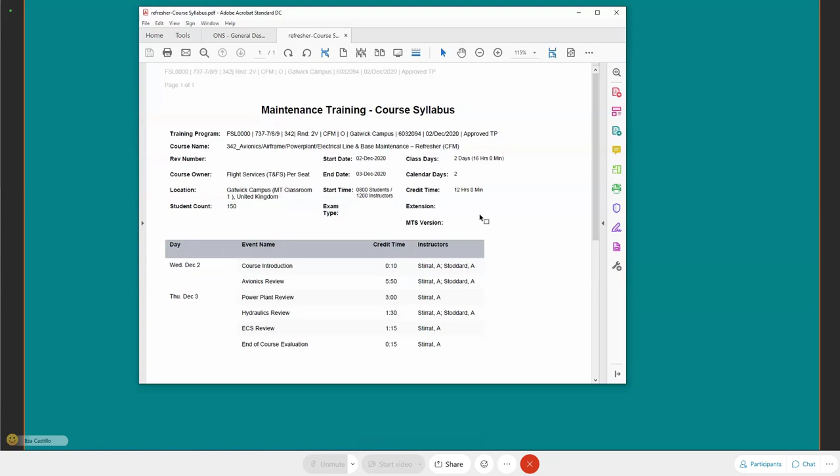This is our schedule for today. Hopefully you can see it. What we're going to review is going to be the power plant. So the power plant will look at the LEAP engine, the electrical, and the fuel system this morning. That will take us up to lunch. Then we'll take about 45 minutes to an hour for lunch. And then the rest of the day, we'll go through the hydraulics. And when I say hydraulics, it's going to be hydraulics, landing gear, and the flight controls. We'll cover all the bits and pieces there.

And then we'll finish up the day with ECS. And the ECS is going to be actually pneumatics, air conditioning, I just lost my train of thought. I glanced over here and saw a chat message there. But anyway, pressurization, there's no change in it, so we won't really cover any of that. We'll get into wing and engine anti-icing, smoke, the equipment smoke portion has changed a little bit. And then just the small bits and pieces. There's about an hour worth of stuff there. So that's what we're going to be looking at, okay? Let me move this over and we will go ahead and get started.

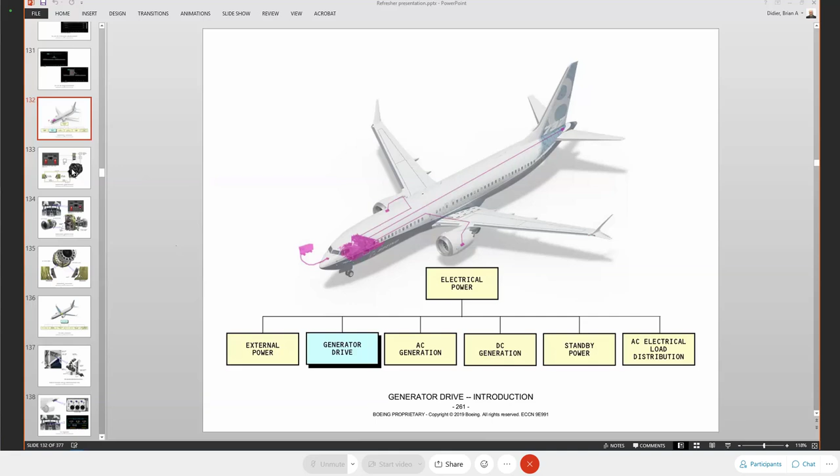So the MAX, the electrical power system on the MAX, no real change on the MAX. It's essentially exactly the same that you experienced with the NG. The bits that have changed with the MAX is really the air oil coolers. Okay, there is no fuel cooled oil cooler on it anymore. That's removed from the system. We have the two air oil coolers.

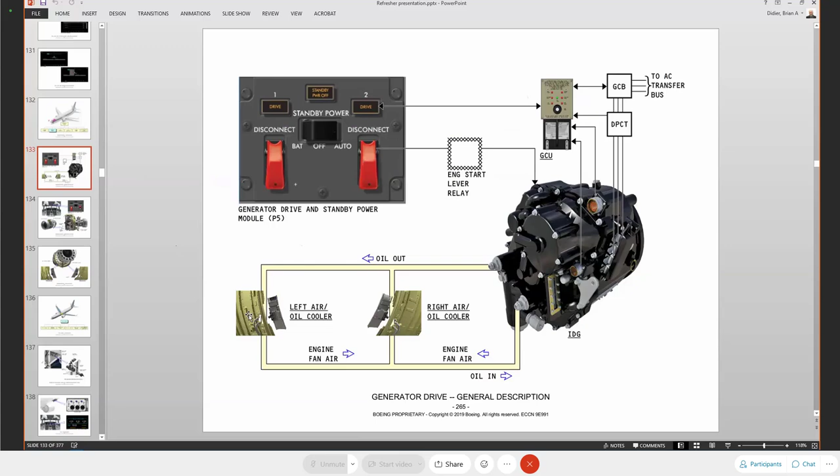These coolers are going to be located in the lower portion of the LEAP engine fan area, okay? So they're going to be down in that section of it. So this is the outer casing of the fan on that side. So when we look at where they'll be, right here is the access point. To access them, you're going to have to open up the fan cowling, and then you'll also have to open the thrust reverser cowling on that side.

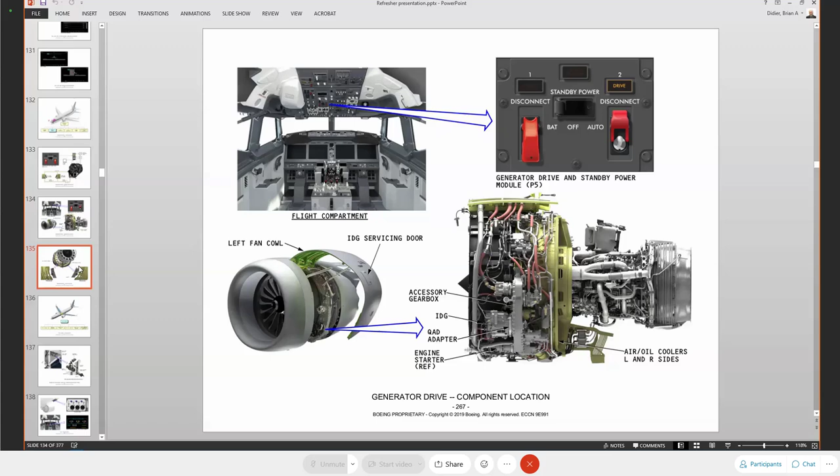They're fin-type surface coolers. You can see them right here, located right in the left and right portion of the engine on the fan. But since they are fin type coolers, they are easily damaged. So if you're having to work in this area for whatever reason, highly recommend that you put the protective covers that go with the system on there so you protect the fins. There is some small allowable damage for the fins, but very little. You'd have to follow the AMM to check on it.

To check the fins to see if there is any damage, what you're going to do is open the fan cowling, the thrust reverser cowling, and then take your flashlight, your torch, as you in England call it, and hold it right in front of the fins, the cooler's fins facing towards you, and then you're able to look through that piece to see if there's any damage on that.

The AMM does tell you that if you have a fin that's bent a little bit, you could try to bend it back. However, be extremely careful because you're probably just going to break the fin off and then you'd have to replace the cooler. So just be careful in that particular area.

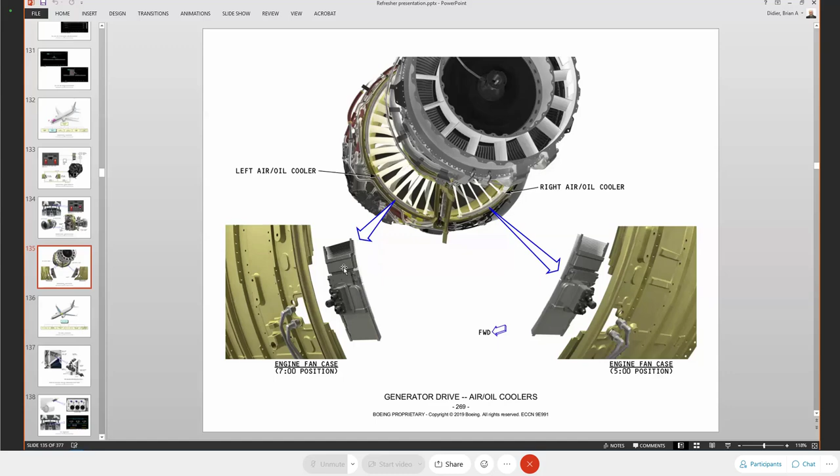To remove and replace the cooler, obviously you're going to have to open up the fan casing, the thrust reversers. You have the two connections right here. And then on the inside, there's going to be a little plate on either end that holds the ends of the cooler down in place, okay? So you just have to look at that. So that's the change as far as the electrical system. Nothing electrical in it other than the cooling portion of it. Other than that, it works exactly the same, like I said, as previously.

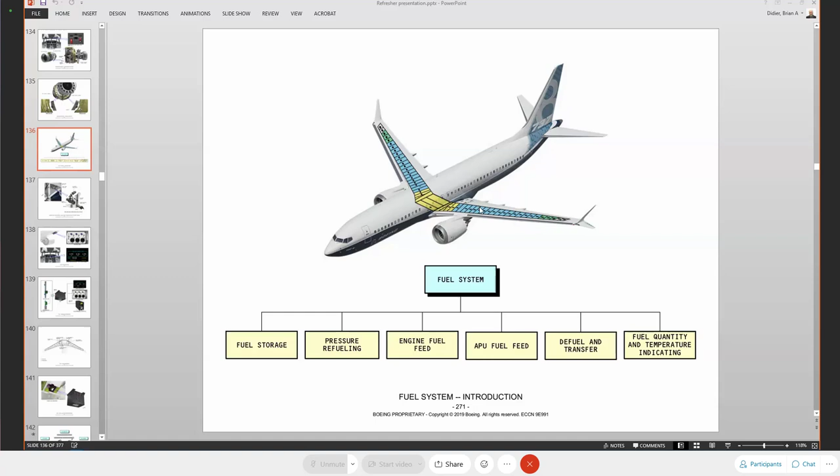The fuel system, not a lot of change to the fuel system as we go through it. Get this back right there. Really what we did is the boost pumps that were on the forward spar, we relocated them to the rear spar of the wing. Okay, so all the boost pumps are going to be in the rear spar of the wing. So we have your aft boost pump and your forward boost pump located in this area right here.

And the reason why they got relocated is because of the engines. Because of the new larger engines, the turbine disc burst area was in that particular area. Okay, so a turbine burst would take out the pumps. So because of certification requirements, that's what caused the pumps to be moved. They're still essentially the same. The boost pumps in main tanks 1 and 2 are interchangeable. The main tank boosts are not interchangeable with the center pumps.

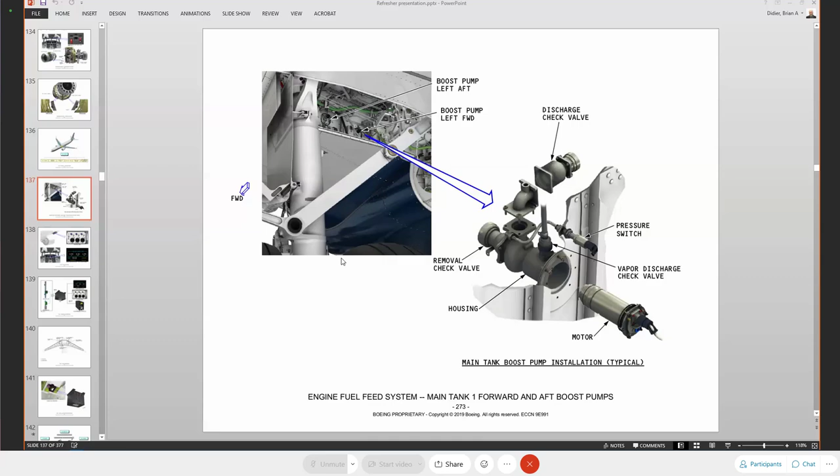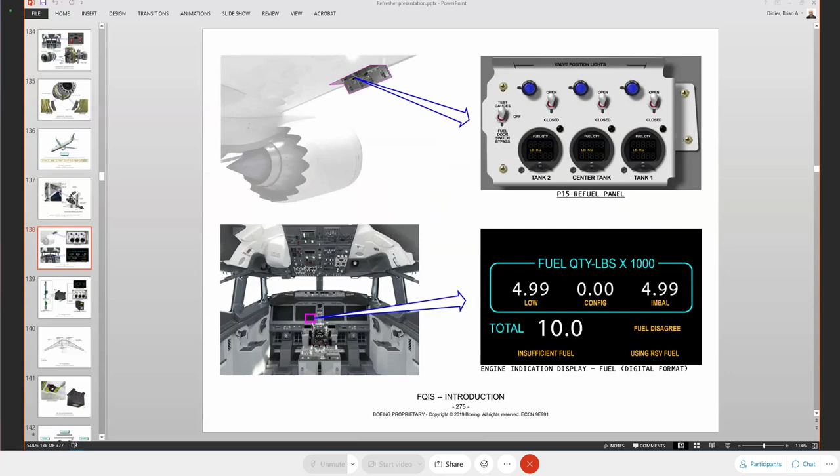Okay? The fuel quantity processing unit, it's a different fuel quantity processing unit. It was redesigned to account for relocation to the ceiling of the forward cargo compartment. So we moved it from the forward equipment bay area to the forward cargo compartment. So if you open up the forward cargo door and you're looking inboard into the cargo compartment, on your right side, if you raise your right hand up and over to the ceiling, you're going to be pointing to the FQPU, the Fuel Quantity Processing Unit. Okay.

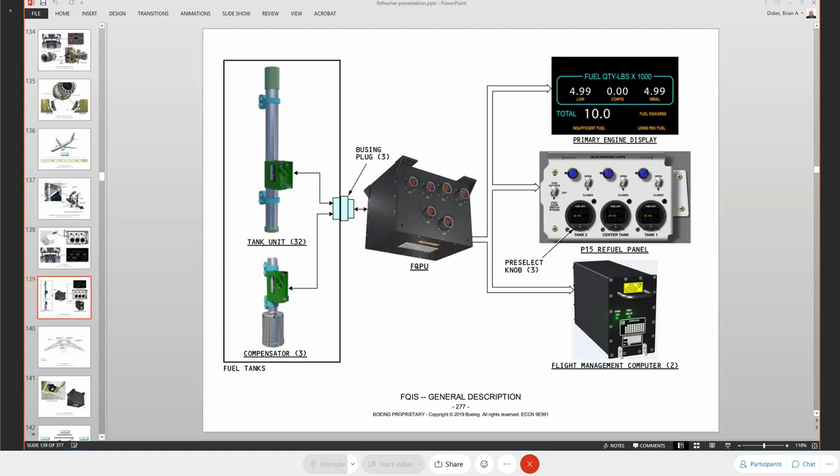New software is also added into the pump, basically because of the new 615 bus that you have. So if we look at it, also our wiring harness has changed. Okay, the harness is not necessarily totally different, but basically the busing plug, we moved that. It used to be mounted right outboard the engines, but we put them in the hole where the boost pump was moved from. So that's where the busing plugs are located now.

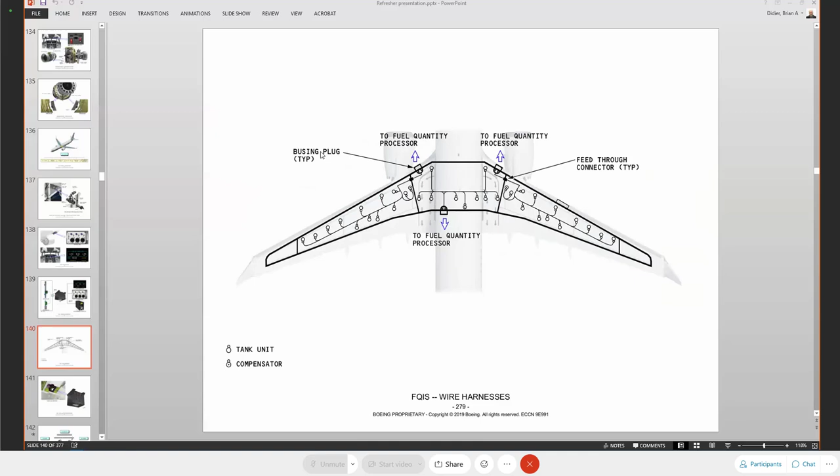Okay. The fuel quantity processing unit, all the BITE on the fuel quantity processing unit is still done through the CDU area. So that hasn't changed at all. What it does is still the same. It's going to calculate the fuel weight. It's going to send the fuel weight out to the FMC, your P15, and the display processing computers. It's going to collect and monitor all the faults.

Okay. Now, the faults are going to be found the same way that you find them in the NG, through the system, through the BITE, through the CDU. However, when Alan was going through the ONS, he would have covered this particular page. One of the things that's here is the network file server. And if you notice right here, we have the fuel quantity processor right in that same area, along with other boxes. Well, the fuel quantity processing unit shares its information with the network file server.

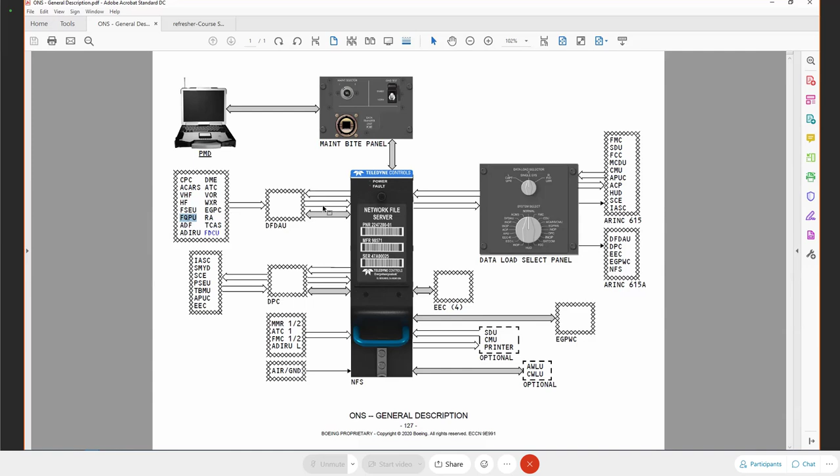It goes to the digital flight data acquisition unit. And since the DFDAU shares its information with the network file server, what that means to you as technicians is that you can open up the onboard maintenance system, go to the existing faults in the extended maintenance page. You can go to the existing faults or fault history, and you can see all the faults that the fuel quantity processing unit may have. So you have a choice. You can either go through the CDU one by one looking at all the faults, or you can open up the onboard maintenance system and see all the existing faults also.

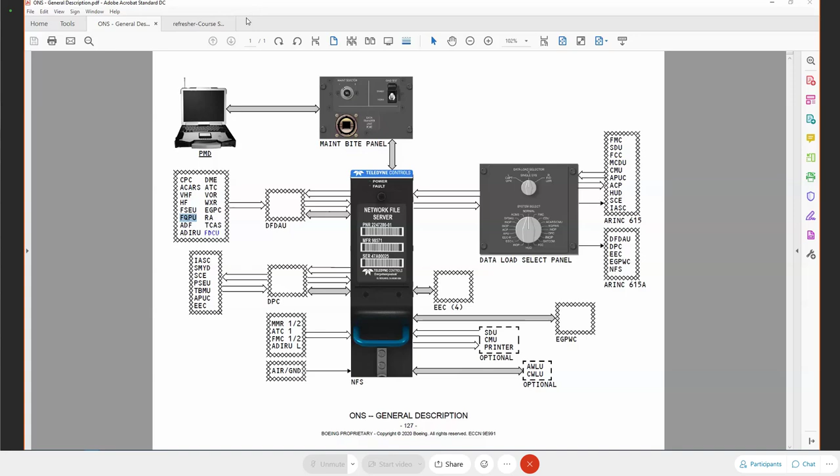So just a little something that you can see. And that's going to be true of all of the boxes located on this general description page. The cabin pressure controller, ACARS, the FSEU, the ADIRU, the flight controls, the fire detection control unit, all of these items are going to be that same way. So just wanted to make sure you knew that. So that's really the fuel quantity processing unit. So not a lot of change.

Let's see, if you have a problem with a fuel tank, will those new messages appear on the display since we're not receiving correct information from the... Alberto. If it picks it up and sets it off as a fault that the FQPU is sensing, then you would see it. All the maintenance messages will come from the fuel quantity processing unit. Okay.

Hey, Brian. Yes, sir. I'm sorry. I guess this question is, because you've got tank 1, tank 2, and center tank, if tank number 1 dashes out, because we've seen that before on the NG airplanes, you get your new messages, which are your insufficient fuel, fuel reserve, fuel disagree. So if tank number 1 goes dash and you see center tank and tank number 2, you're not getting the information. Is that going to cause any of those insufficient fuel reserve indications to come up since we're not getting all the information? Is our flight crew going to see that if we MEL any of the tanks?

That's a good question. I'm not sure, so let me find out from Seattle and I'll get you guys back an answer. If I don't get the answer back from them today, since I have all of your emails, I will email you that answer. Thank you, sir. My pleasure.

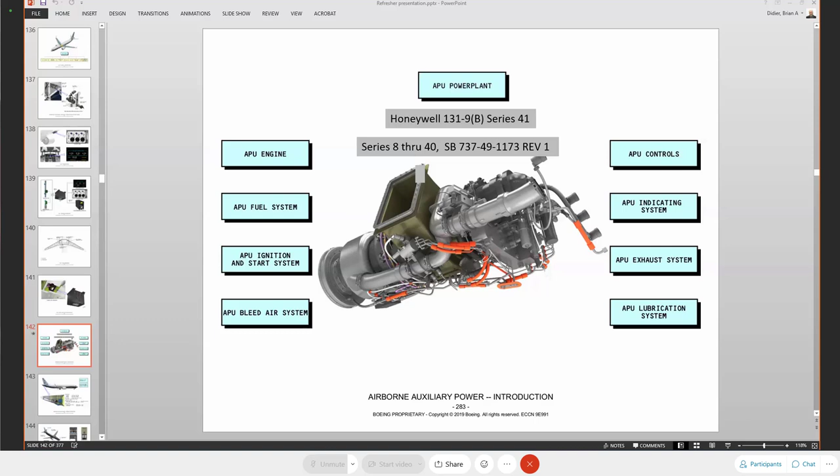So what we have on the APU is only the Series 41 APU can be used, okay? For the Series 41, there is a service bulletin out that allows you to change your Series 8 through 40 APUs into a Series 41 APU so that you can use those ones also. But you need to use that service bulletin to do that. Really what the change is, the mounting and the placement of the APU is in a slightly different way, and the mounting is a little bit heavier in that portion of it, okay?

The APU door is a new inlet door with a 28 volt DC actuator driving it. It's going to be moved into 3 different positions: either closed, open at about a 45-degree angle on the ground, or if in flight, open about 17 degrees. Those are the 3 positions for the APU, and we'll look at that in just a moment.

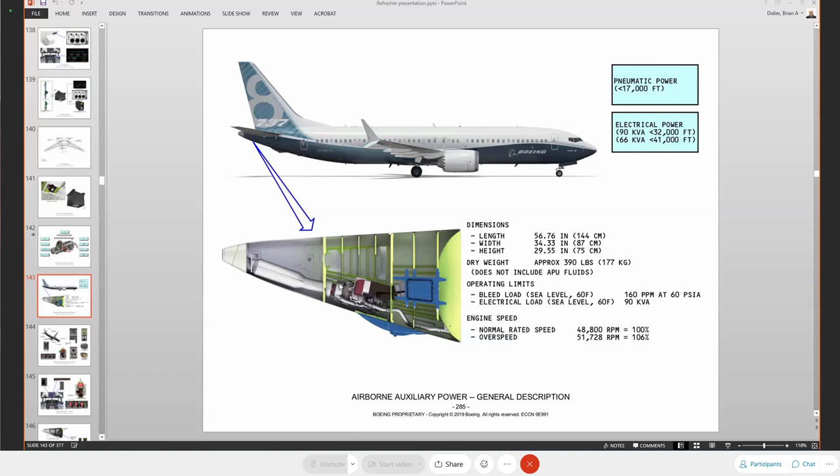The other thing that is different on the NG, we no longer have that eductor ducting for the cooling side. Cooling does go around inside the APU, but the ducting has changed there.

Controls and components, same controls that you had on the NG. Same controls, location of them are all in the same basic area. What has changed, of course, is going to be our control panels.

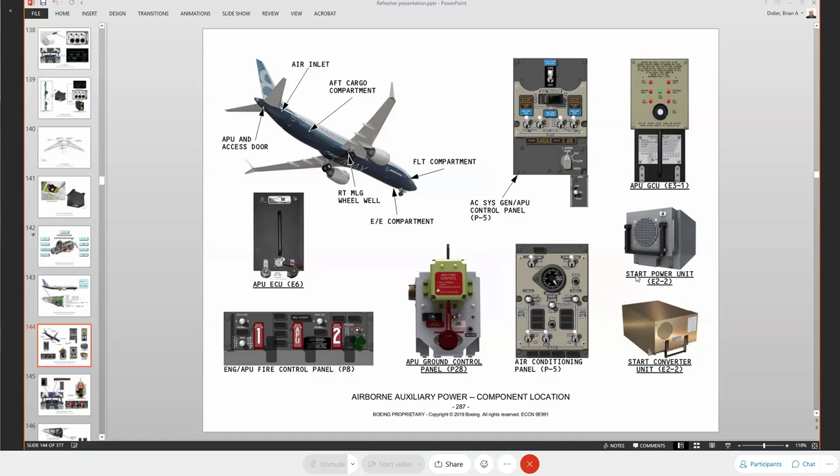If we look at our sys control, this is our APU area here. Looking at our controls, you still have the same APU switch, but our indications have changed a little bit. We have an amber door light now, the low oil pressure light, fault and the overspeed, and the blue maintenance light is removed.

Why is the blue maintenance light removed? Because all the maintenance messages are going to become maintenance messages in the OMF, and if it becomes a status message of some sort, it's going to illuminate or be shown on your status message page, and then illuminate the maintenance light also.

Other than that, everything else is still the same. Starting the APU is going to be exactly the same as you do on the NG. The only thing that you're missing at this point is going to be the EGT gauge that was also on this panel.

The EGT gauge is now on the APU data, maintenance data pages. So the only indication that you have is the low oil pressure light, and it's going to go off after a few seconds when you start the APU, and then you'll get the generator bus light come on when it's up and running. So pretty much the same.

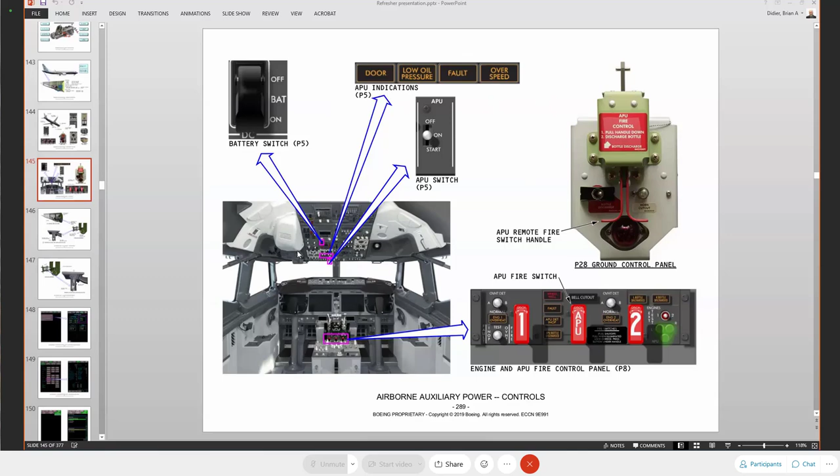The other bad thing about that is it's recorded in the DMM that the APU has, and if the APU got damaged and you went back to Honeywell saying, hey, my APU is not working, it's damaged, I need a new one, well, you had voided your warranty. So make sure we shut it down properly.

The APU inlet door, you have the APU inlet door and then you're in the access area there. If you're looking at the back side of the APU door, you have the actuator, and the actuator is going to be inside of this silver can protecting it.

Right on the edge of the door is going to be an inlet door open switch. The open door switch is what's going to monitor when the door is open or closed.

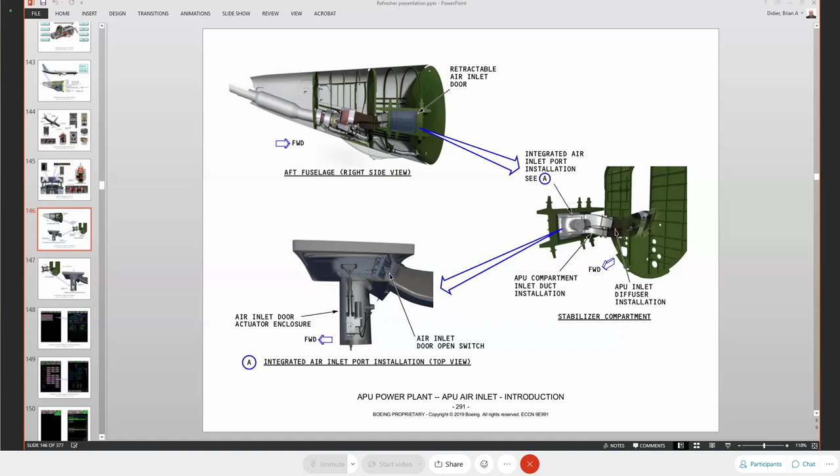There will be another set of switches inside the actuator that is going to be monitoring how far the door is open—is it that 45 degrees or 17 degrees, or is it closed now. So we have those areas.

So this is a little bit closer, so you can see the air inlet door switch right here. This is the actuator right here, and there's also a rod sticking out here. It is possible to manually open and close the door if you need to.

Let's say the actuator has failed and you need to run the APU in flight following the MEL procedures. It's going to allow you to open up the actuator door. It'll take two people: one following the instructions and using the tool to drive the door open, and another person outside the plane to measure how far the door has moved. But it is possible to do that.

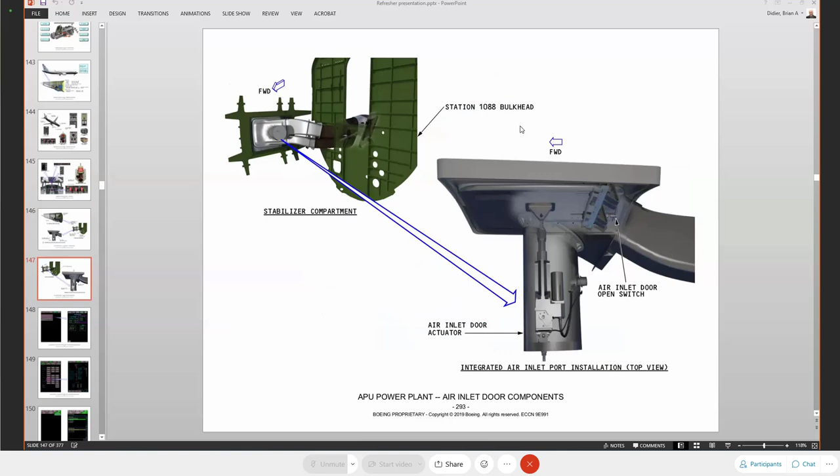Inside the OMF portion, in your maintenance control pages, in your miscellaneous system controls, you have the ability to power up the engine control, the APU ECU portion. What that's going to do is allow you to do the bite test for the APU. The APU does the bite test whenever the ECU is initially powered up, and you can power it up either through the soft switch here in the control pages for test, or you can turn the switch on up on the P5 panel, either one of those two areas.

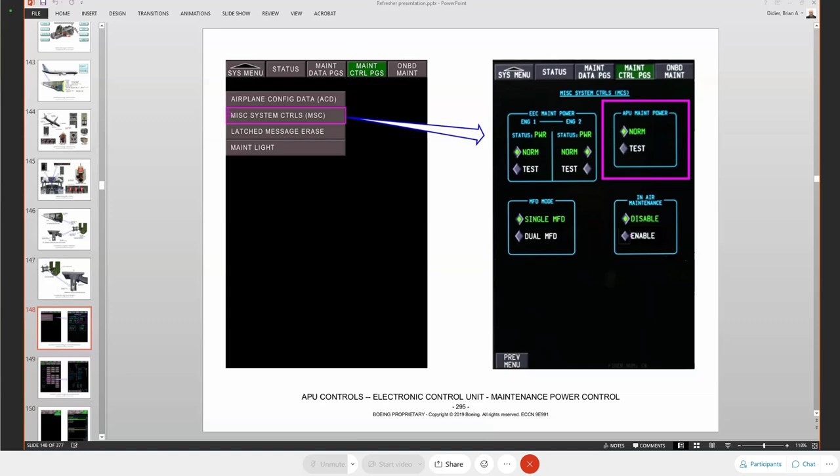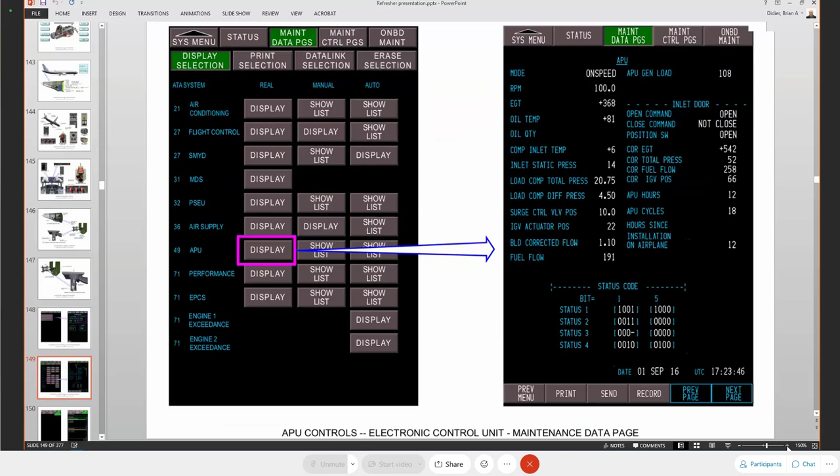The data pages, as Alan went through with you yesterday, going through the maintenance data pages, display selection, and then if you go down to the APU, chapter 49, and hit the display selection, that's going to bring up the data pages for the APU. On the data pages, you have the mode, generator load, RPM, and EGT, oil temperature, oil quantity.

This is where you're going to check the oil quantity. It's going to be either full, add, or low indication. You have to have the APU ECU energized in order to have that quantity there, but that's going to tell you the quantity of the oil.

The inlet temperature, your load compressor, your IGV actuators, fuel flows, the inlet door position, corrected EGT, total pressure, fuel flow, and your IGV position. Typically your corrected EGT is what you're going to use for monitoring trend analysis. APU hours, your APU cycles, and hours since installation on the airplane.

The bit information down here is information that goes to Honeywell.

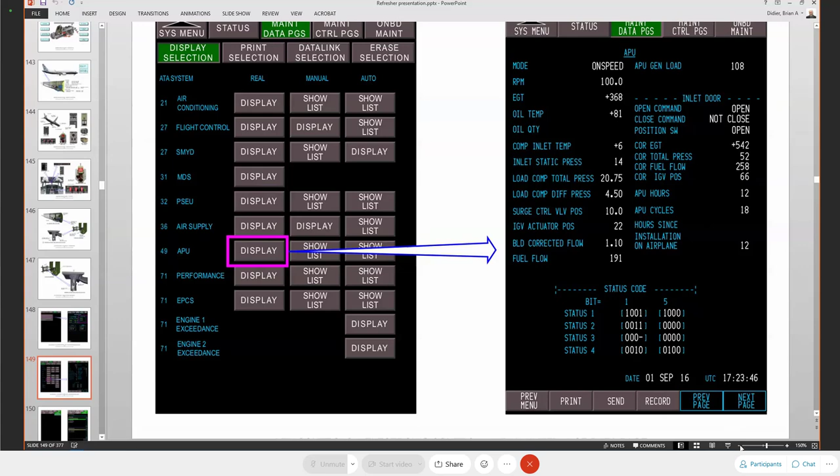A lot of information available to you today on the MAX that you did not have available to you previously.

In our onboard maintenance section, other functions, special functions. You have special functions. When you select it, you'd select the APU auxiliary power system, and then there are three system functions that you are able to select.

The three system functions are going to be: reset hours since installation. So when you install it, you could reset the hours inside the OMF on the data page.

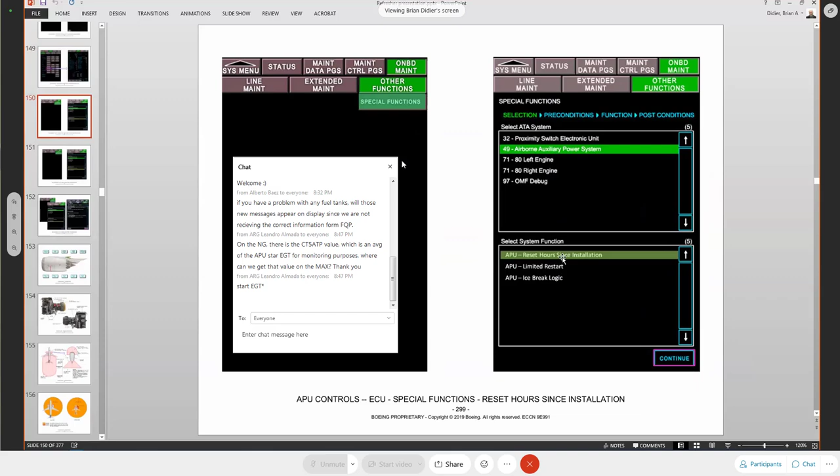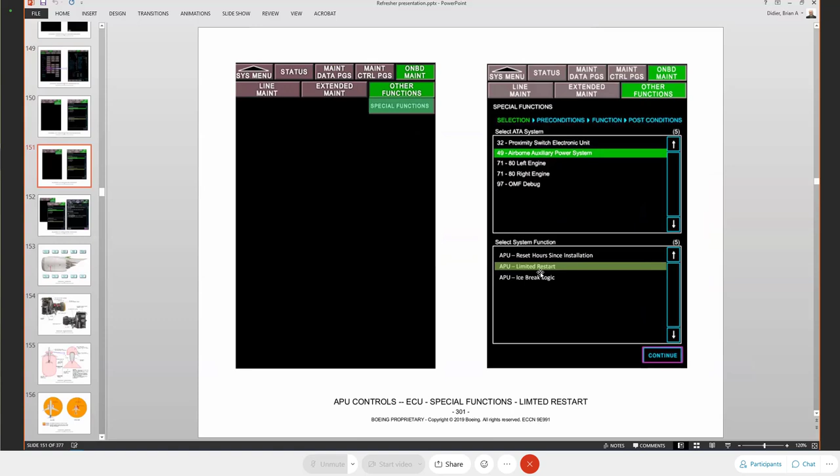You have a limited restart section. The limited restart is if the APU did a protective shutdown for some reason -- some of those items are going to cause or be latched inside the ECU, and you would have to come right here to clear that piece after you fix the problem.

To be able to start the APU up, okay, the ice break logic is essentially an on-off function. So you can turn it on if you need the ice break portion, or you can turn it off for the inlet guide vanes. What ice break logic does is, when it's on, the system is going to periodically sweep the APU IGVs to ensure that there's no ice on the APU IGVs.

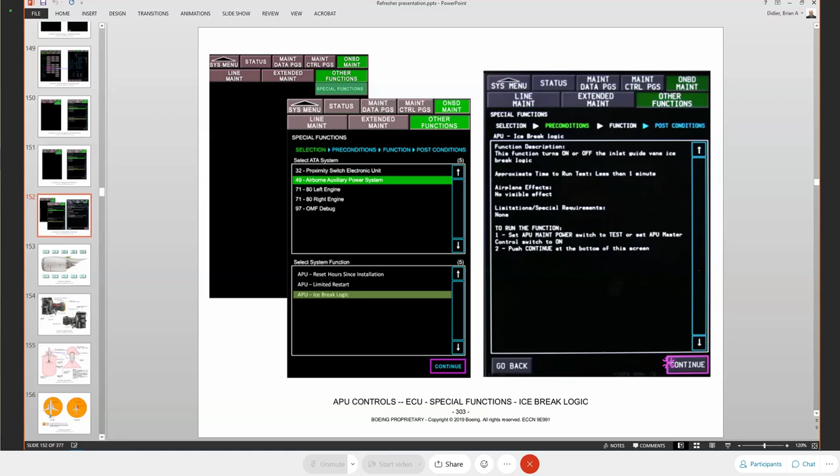If you turn it off, you're just removing that logic so it doesn't work. When it's on, it works automatically. What the ECU is looking at is the temperature. If it's near freezing, it's going to sweep the IGVs. Some of you may not be flying in an area where this would be a problem. Some of the rest of you may be, but this is a choice you can make. That's really the APU.

The controls on it, like I said, are very similar. You do not have the maintenance light anymore. You do not have the EGT gauge on that piece, but the operation of it is still pretty much the same as you have.

The LEAP engine. Obviously, the LEAP engine is a new component for us. It's a much larger engine than we've had in the past. LEAP stands for Leading Edge Aviation Propulsion. We're not going to get into all of the ATAs that cover the engine, because some of them are very much the same as the NG. But we'll spend until lunchtime on the power plant at this point.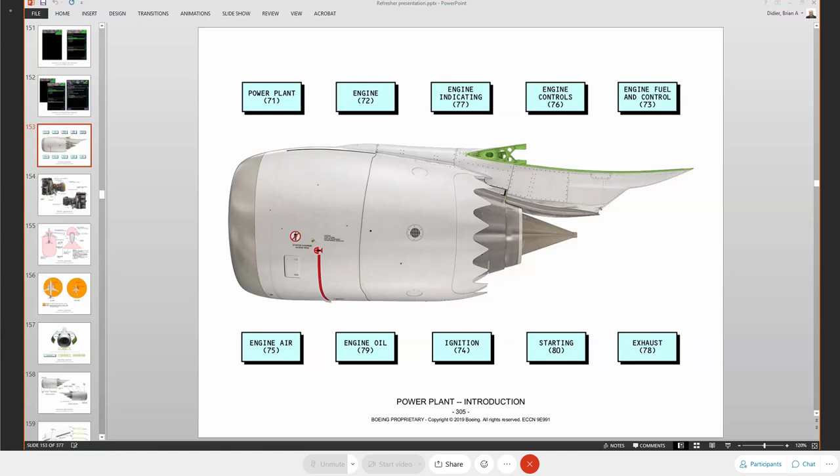The engine itself, if we look at our components on the left and right side of the engine: on the left side, up on top, this is our main fuel oil heat exchanger, and this is the fuel metering unit. The fuel metering unit, and then on the core engine, the split control unit.

On the CFM engine, that was the hydromechanical unit, the HMU. So on the LEAP engine, essentially it's split apart. You have the fuel metering unit on the left side of the fan case, and the split control unit on the core portion of the engine on the left side.

Also down the left side of the engine is the accessory gearbox. On the front side of the accessory gearbox, we'll look at the starting piece, the starter motor, down in the 6 o'clock position. This is the starting ducting for the pneumatic system going to the starter motor. Ignition boxes are located at the 6 o'clock position under the engine. We have 2 drain masts, one for the fan case, one for the core engine portion. The high pressure turbine and low pressure turbine active clearance control.

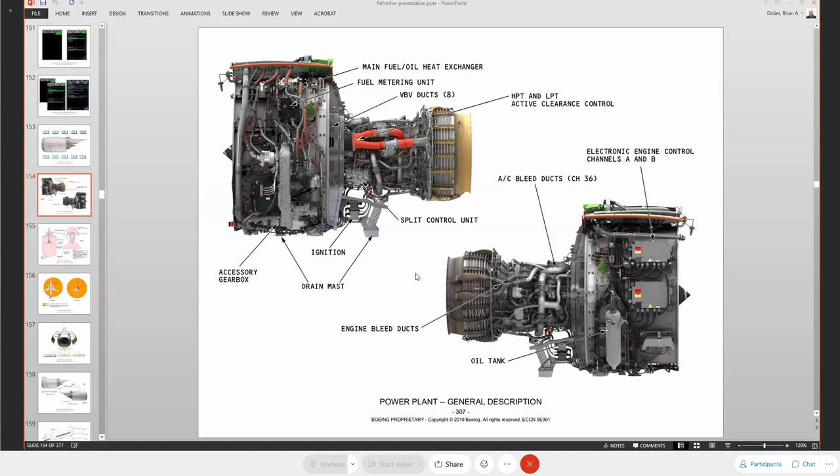Danger areas, hazard areas of the engine. This engine is much larger than your CFM engine, much larger. Make sure that you provide the appropriate caution when you're working or you're around the engine. There is absolutely zero safe area in anything other than idle. Okay, if there is no safe area.

The other thing you have to be careful about here with the engine is if you're working on it or you're having to go into the entry-exit corridor, there's only one way that you can go into it. But make sure that you have positive communication between whoever is running the engine and whoever is using that corridor. It's mandatory.

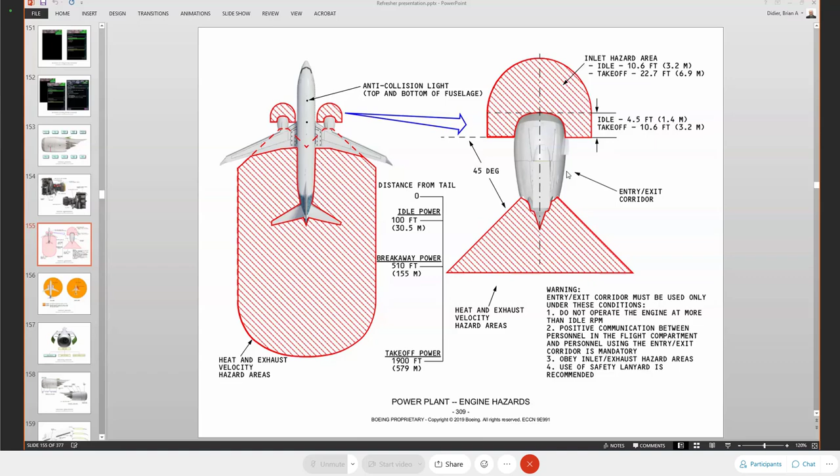So make sure that you supply the sufficient amount of caution and ensure that you have the communication with whoever is running this engine. So just be aware of that.

Appropriate ear protection. Make sure you have the appropriate ear protection when you're working around the engine. Always do that. I know that some of my hearing is gone because when I worked the engine test cells, I would be underneath an engine making an adjustment on the fuel controls, okay, on that area. So it is real. Make sure you take good protection of your ears on that, okay?

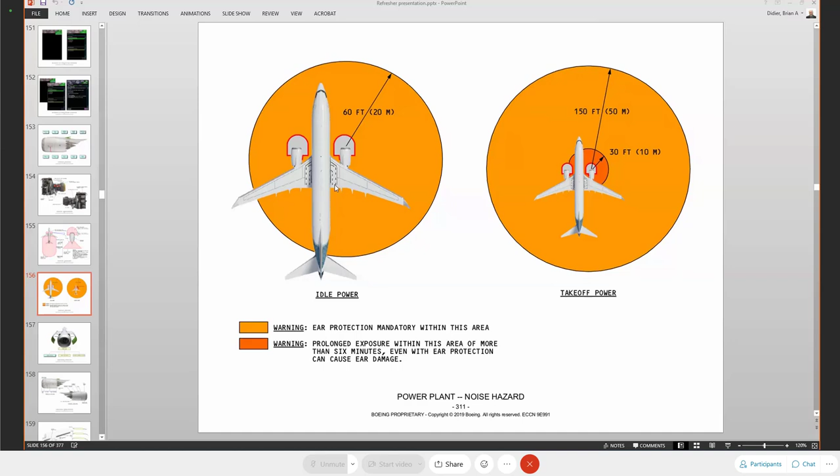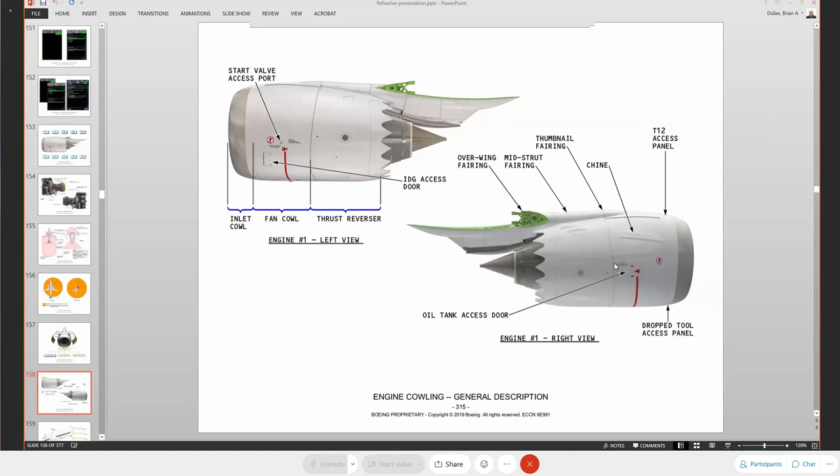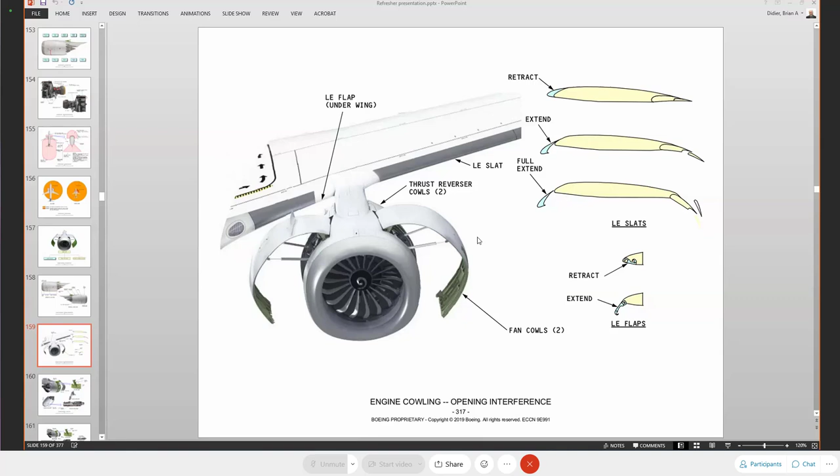Opening interference with the cowling, make sure, as you can see right here, the inboard flaps portion can in fact contact the engine cowling, so make sure that you're aware of that when you're either opening the cowling or moving the flaps, make sure that you're very much aware of that. And then the same thing on your outboard side of the system, okay?

Fan cowling latches. Now the fan cowling latches and the hold open rod assemblies and the spring assist rod assembly.

There are things you have to be aware of here, and we'll look at that. Since this fan cowling is quite a bit larger than the CFM, it's awkward when you're opening it. It's heavy, and it's flexing and whatnot. The spring door opening system, or hold open system, is there to assist you in opening that fan system.

So what they're going to do is, as you're raising the door up, when you get up to about 61 degrees, it's going to lock in place and hold it up in that area to prevent it from coming down. It's going to take a little bit to hold it up.

When you are closing it, it takes two people. You're going to unlock it. One person is going to then slowly lower it, and when you lower it down, you're going to ensure that it's aligned up and put in place.

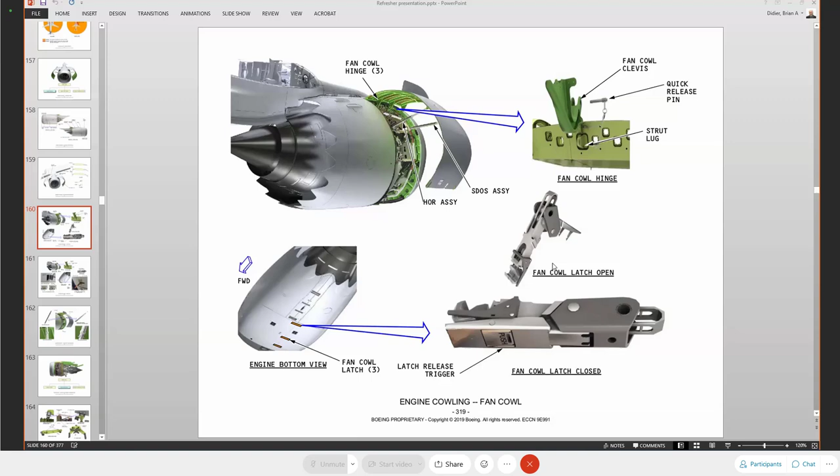There have been some new items installed onto the fan cowling to help ensure that you're actually lining it up properly. There are some other things that have changed on the fan cowling too. You do not have this page in your book; I just added it because we just updated it on that particular piece.

On the bottom, first of all, we have a new indication system. There's a latch indication system that's coming out of the oil tank access door. When you open the oil tank access door, you reach inside and pull this latch indication system out in that direction so that it looks like this.

What that's going to do is cause a teleflex cable, coming to the mechanical portion on the inside of the cowling, to rotate this center blade. So when you pull it out, it is going to rotate the center blade, and this blade then goes to the open position as shown here.

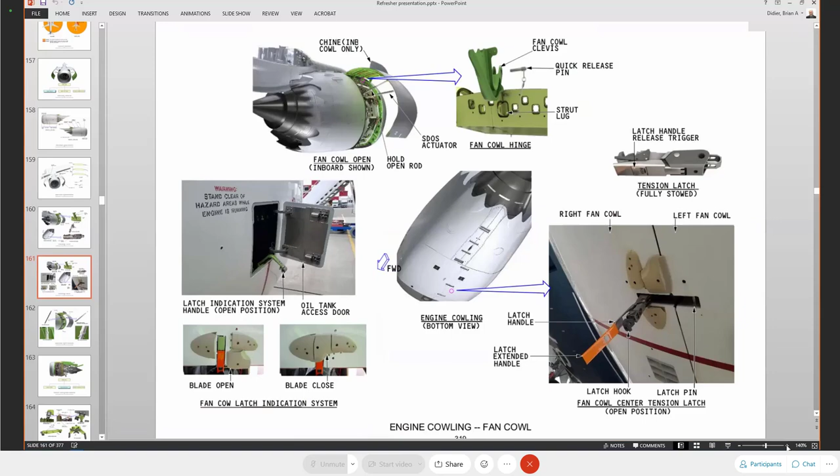So you pull that handle, and it's going to rotate this blade out of the way, and that gives you access to the latch for the center latch. It's not on the forward or the aft latch, it's only on the center.

When you unlatch it, you have your latch handle release, then your latch hook and your latch pin, and you're able to release it. You have the latch extended handle. It is colored bright orange so that it is a high visibility handle, telling you that the fan cowling is not latched. Both of these are also for the pilots during their walk around.

When they go and check the engine, they can bend down and look to see that all of these are in fact not hanging down. They can also tell by the oil tank access door if the center latch is latched and closed. You cannot close the door, obviously, if that latch is not closed and this portion has been pushed back inside.

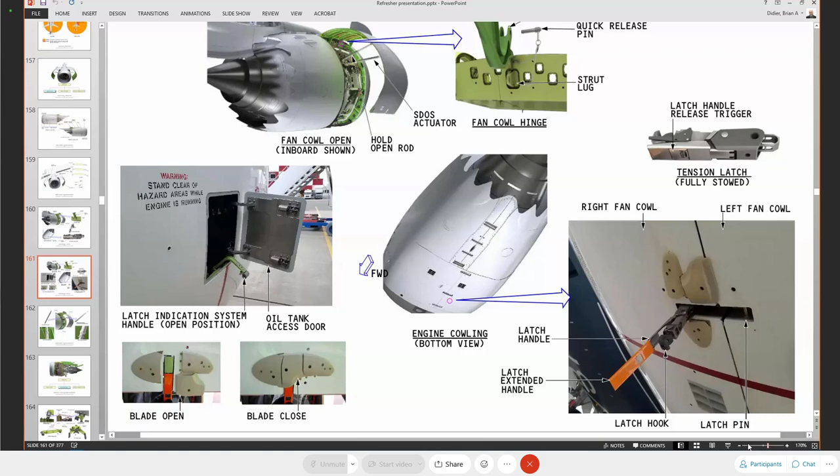So those have been added. This was added to ensure that you have a positive indication that the door, or the latch, is in fact closed, okay?

The hold open rod assembly is just two-position, and it's there to hold open the system. But the spring door opening system—this spring door opening rod has a spring inside it that is under high pressure.

It's under high pressure, so you have to follow the AMM exactly, in order, when you remove and replace this door opening system.

First of all, you do not remove it until the door is in the full open position as shown here. What that does is allow the spring door opening rod to be fully extended.

That allows the door to the spring opening system to be fully extended, and the pressure on the spring is no longer there. Then you can remove the rod—the bolt that's holding the front portion of it—and remove the back portion of it without any danger.